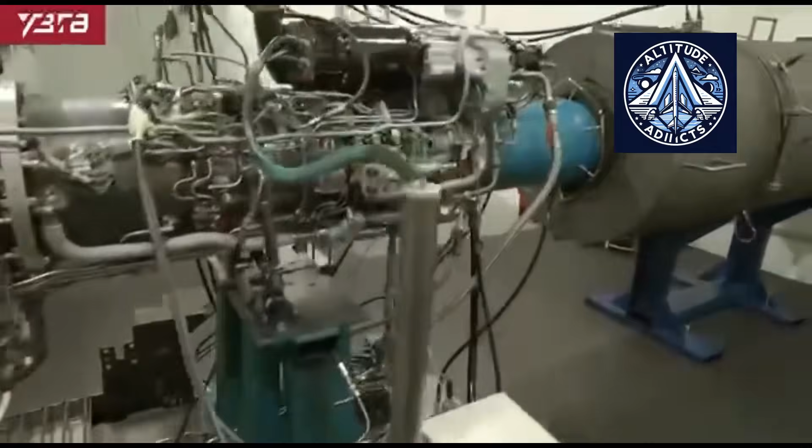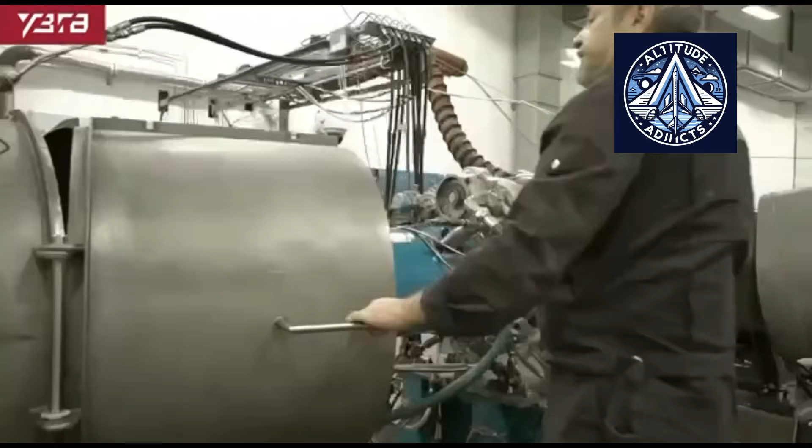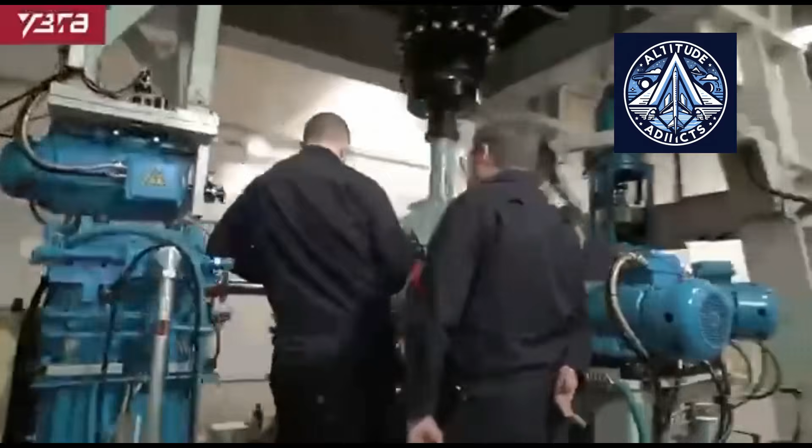Ural Civil Aviation Plant achieved a major technological milestone in Russia's aviation industry on April 22, 2026. The plant announced the successful completion of its transition to a fully domestic, computer-aided design system for onboard cable network development. At the center of this shift is CAD Max, a specialized Russian platform designed to automate complex engineering processes in aircraft systems.

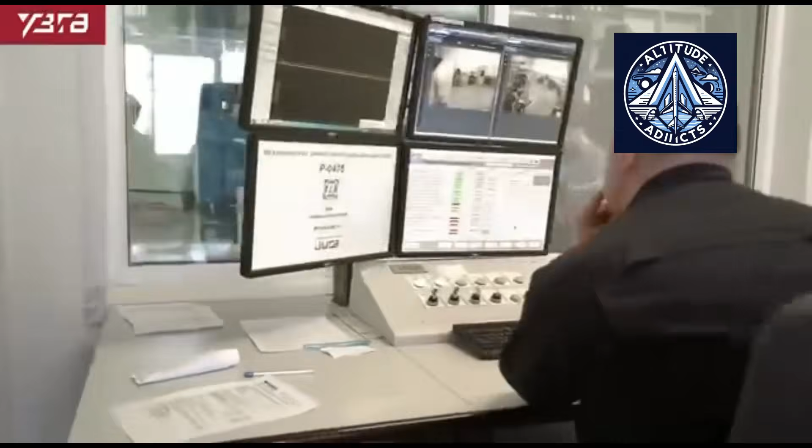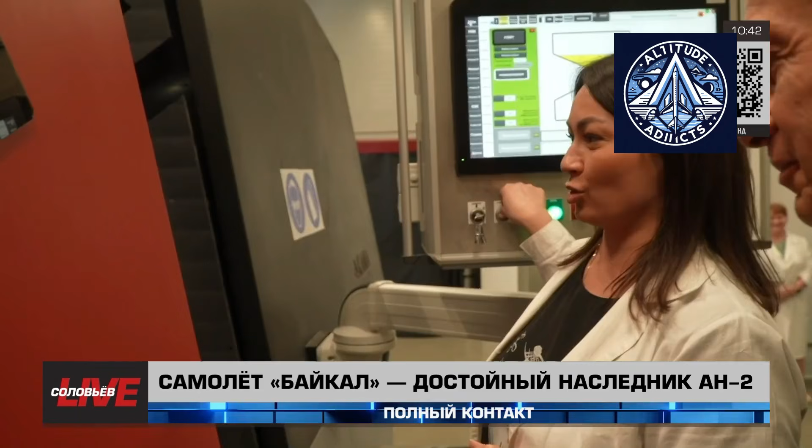This shift is far more than just replacing one software tool with another. It represents a deeper transformation in engineering methodology, industrial strategy, and digital independence. By moving away from foreign solutions like Mentor Graphics Capital and Zuken E3 series, the plant has taken a decisive step toward technological self-reliance without sacrificing performance or efficiency.

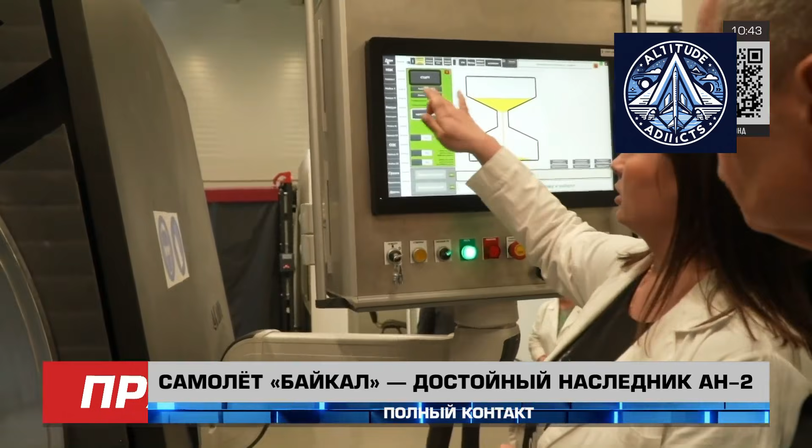And this naturally brings us to why cable network design is so critical in aviation. Modern aircraft are incredibly complex electrical ecosystems. Beneath the fuselage lies an intricate web of wires, connectors, and harnesses linking avionics, engines, sensors, and control systems. Designing these systems requires extreme precision, reliability, and strict adherence to safety standards.

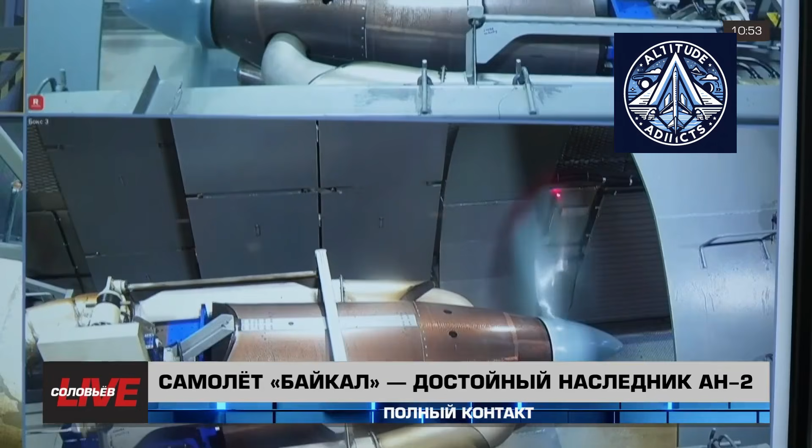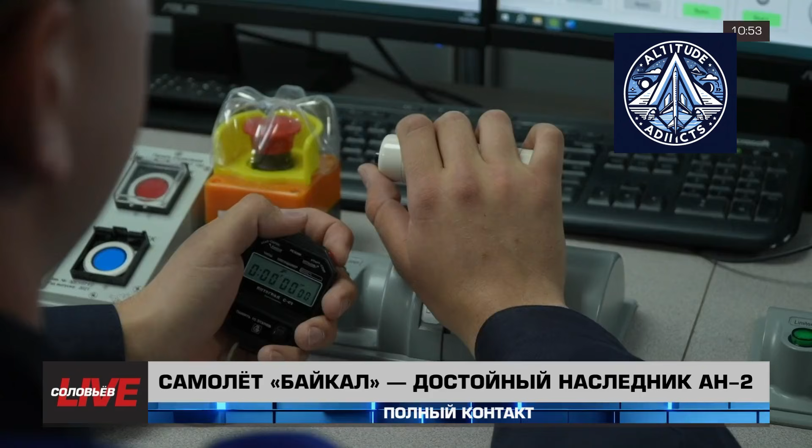Going further, cable design is not just about routing wires. Engineers must consider weight optimization, electromagnetic compatibility, durability under extreme conditions, and ease of maintenance. A single aircraft can contain hundreds of kilometers of wiring, making manual design nearly impossible. This is exactly where advanced CAD systems become essential. They allow engineers to model electrical systems digitally, simulate performance, and validate designs before production even begins.

For years, global leaders like Mentor Graphics and Zuken dominated this space, providing powerful tools for aerospace and automotive industries. However, reliance on foreign software comes with risks. When vendors exit a market, companies can suddenly lose access to support, updates, and even licenses. That is precisely what happened here, pushing engineers to urgently find a domestic alternative. Which leads directly into understanding what CAD Max actually is.

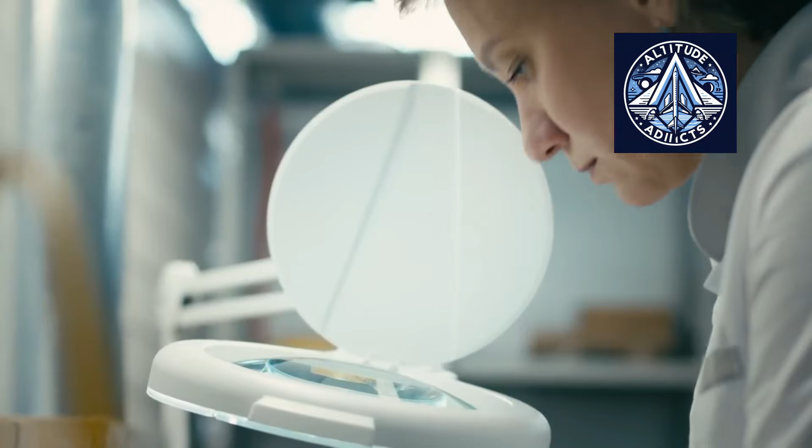CAD Max is a specialized Russian system developed for the automated design of onboard cable networks, along with hydraulic and pneumatic pipeline systems. It was created by the Aerospace Systems Design Bureau under Promtech Corporation. The system represents nearly 5 years of development and was introduced around 2020. It is now officially included in Russia's domestic software registry, confirming its readiness for industrial-scale deployment.

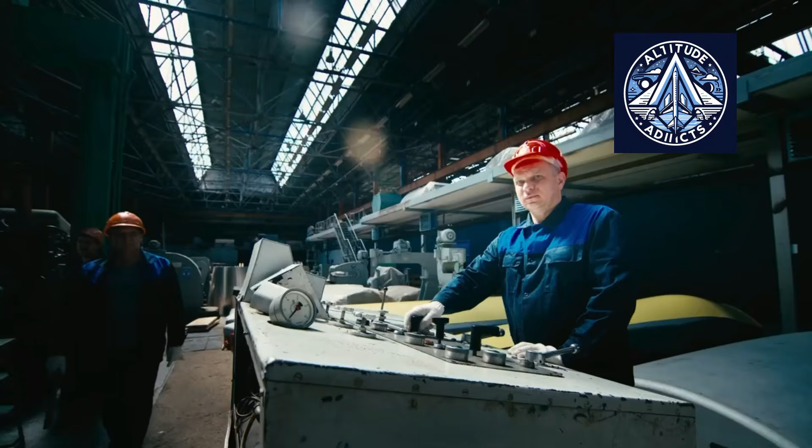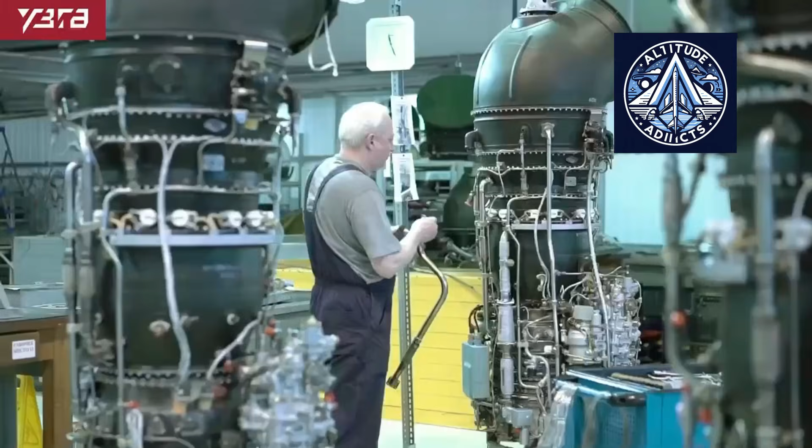At its core, CAD Max is a full engineering platform. It allows designers to build a complete digital model of an aircraft's electrical architecture, covering both logical schematics and physical layouts. This ensures accuracy and consistency across the entire system. The platform also uses a client-server architecture. This means multiple engineers can work simultaneously in a shared digital environment with real-time updates available to everyone involved, from design teams to production engineers.

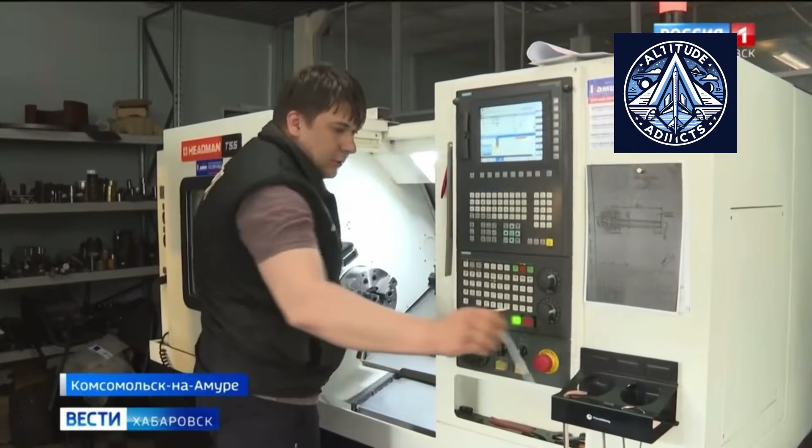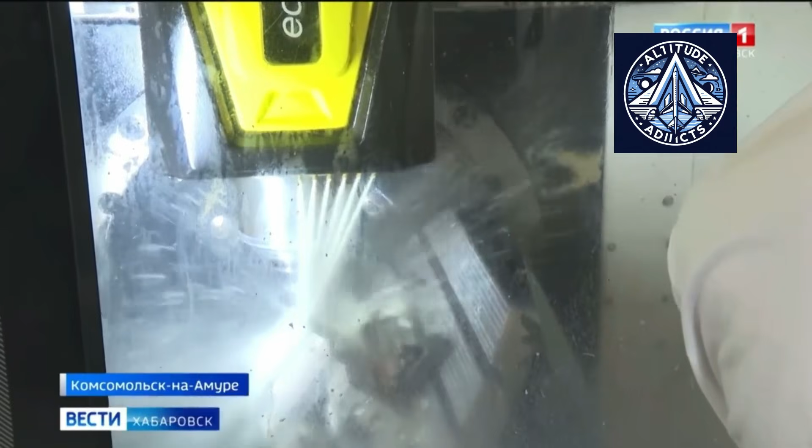Now, focusing on its capabilities, automation is where CAD Max truly stands out. The system performs complex engineering checks automatically, reducing manual workload and minimizing human error. For example, it verifies wire cross-sections, checks connector compatibility, selects appropriate materials, and even calculates bundle thickness and routing constraints. These processes happen in real time during design.

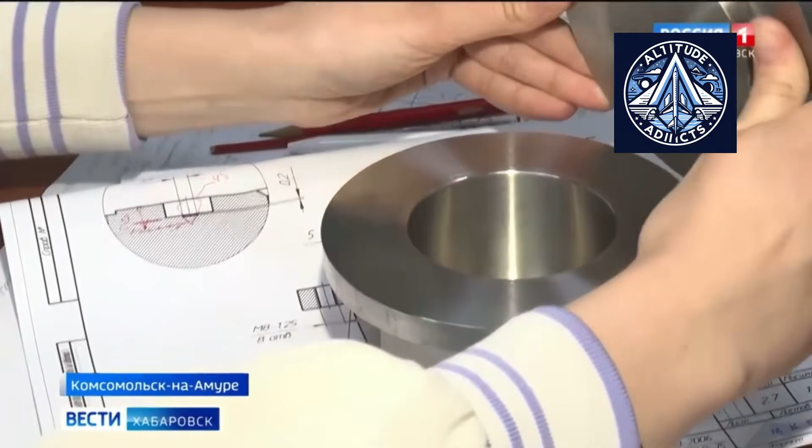At the same time, the software generates complete engineering documentation automatically. This includes drawings, specifications, wiring tables, and manufacturing instructions, all derived directly from the digital model. Another key advantage is real-time monitoring. Engineers can track system weight, material usage, and other parameters throughout the design process, enabling better optimization from the very beginning. And naturally, such a system must fit into a larger digital ecosystem.

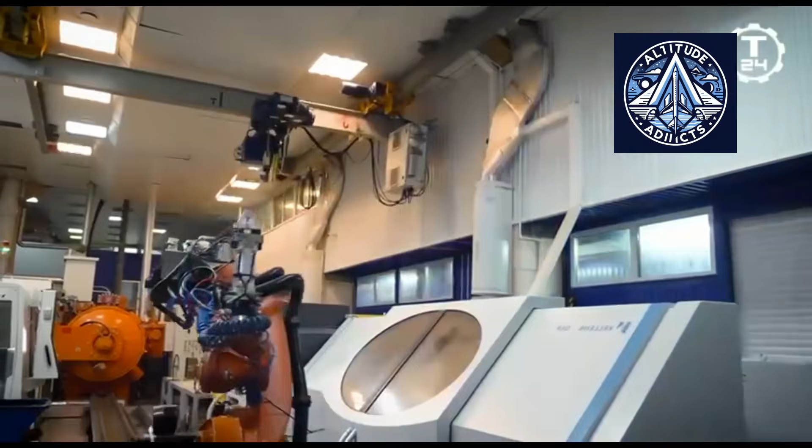The implementation at UZGA involved deep integration with existing IT infrastructure, including synchronization with a master data system based on 1C. Each component receives a unique identifier, and once created, its data becomes instantly accessible across all connected systems. This eliminates inconsistencies and ensures seamless coordination between departments. In effect, this creates a unified digital environment. Design, manufacturing, and logistics systems all operate from the same dataset, improving efficiency and transparency across the enterprise.

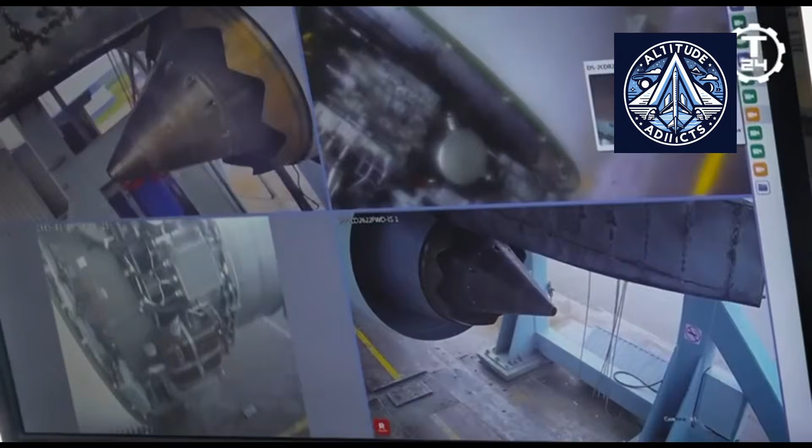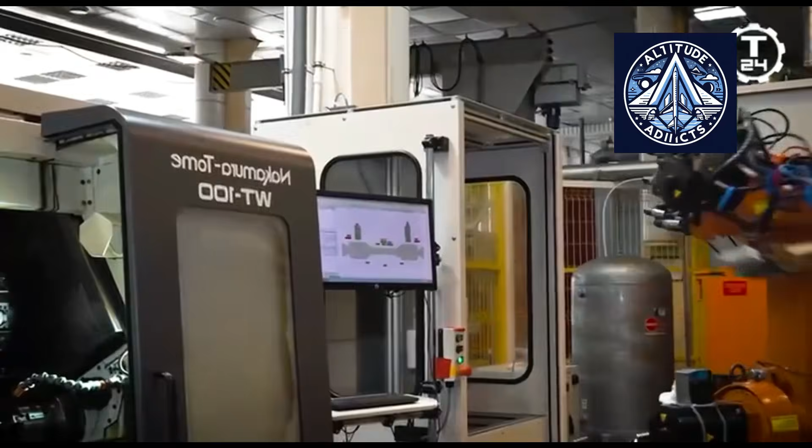When compared globally, systems like Mentor Graphics Capital and Zuken E3 Series have long been industry benchmarks. They offer advanced features such as three-dimensional visualization, simulation tools, and lifecycle integration. CAD Max has been developed to match many of these capabilities while focusing on localization. It aligns with national engineering standards and integrates seamlessly with domestic software ecosystems. This is particularly important in aviation, where data security and system reliability are critical. The platform also supports customization through APIs and plugins, allowing companies to adapt it to their specific workflows.

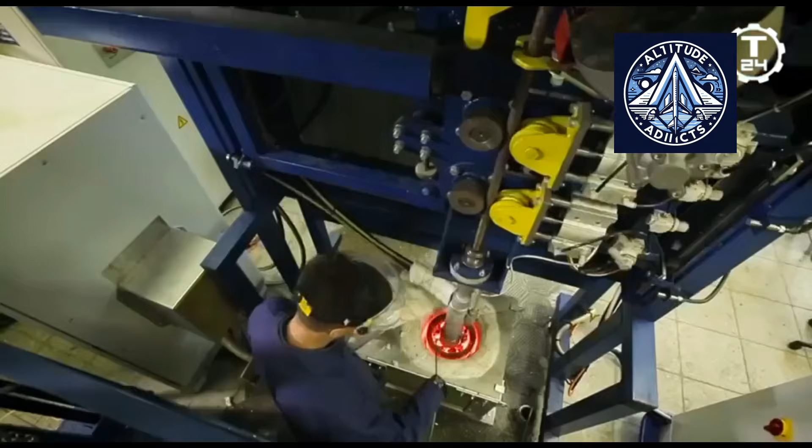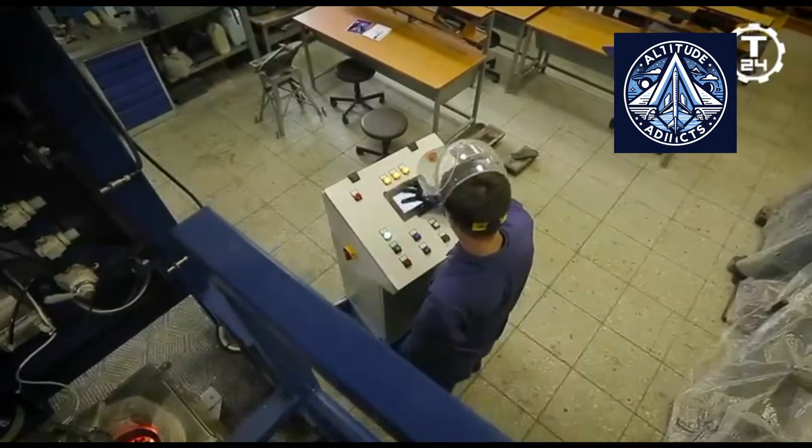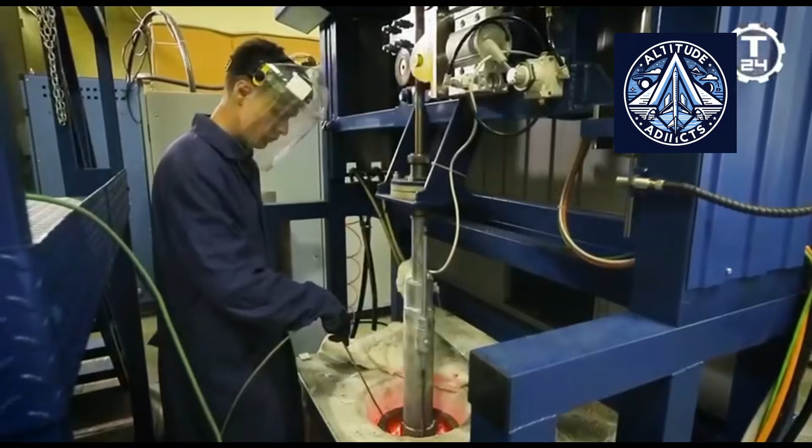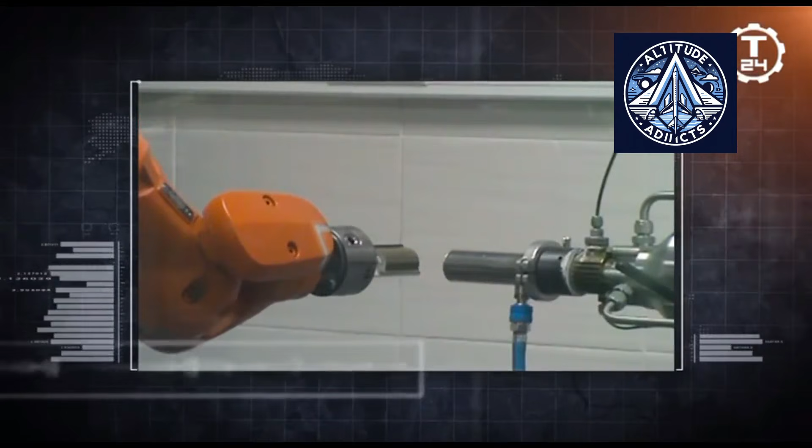Of course, transitioning to a new system is never easy. The process took over a year and required extensive planning, training, and gradual system integration. Engineers had to adapt to new tools and workflows. At the same time, production had to continue without interruption, requiring a careful, phased transition. One major success was preserving the existing component database. Built over years, it was successfully transferred and continues to grow by around 300 new components every month. Despite these challenges, the transition was completed without any loss in productivity or design quality. That alone highlights the robustness of the system.

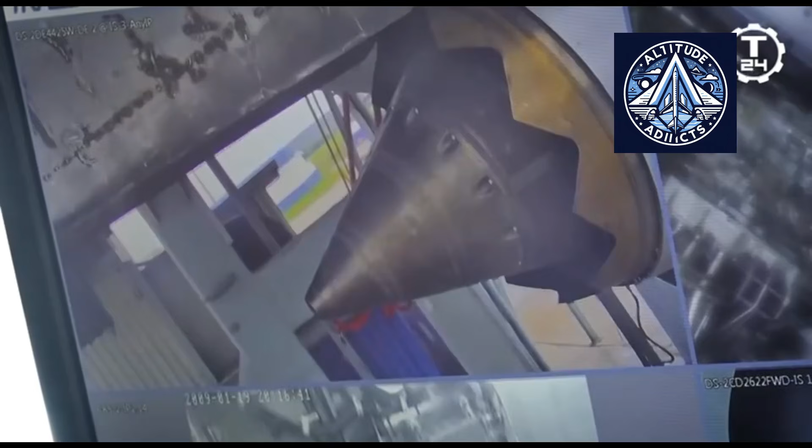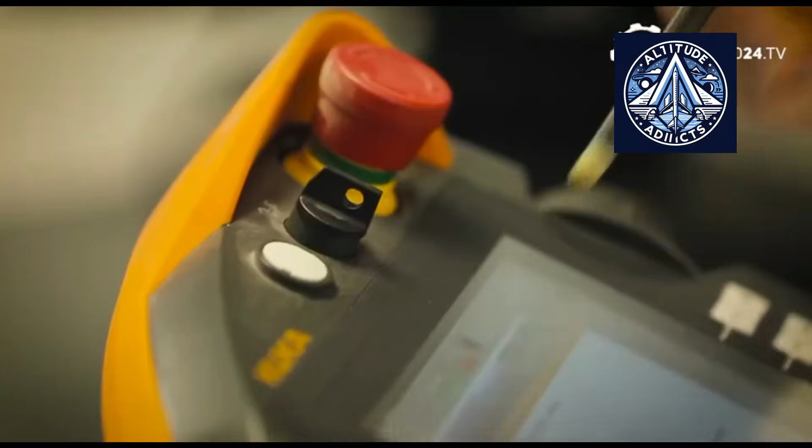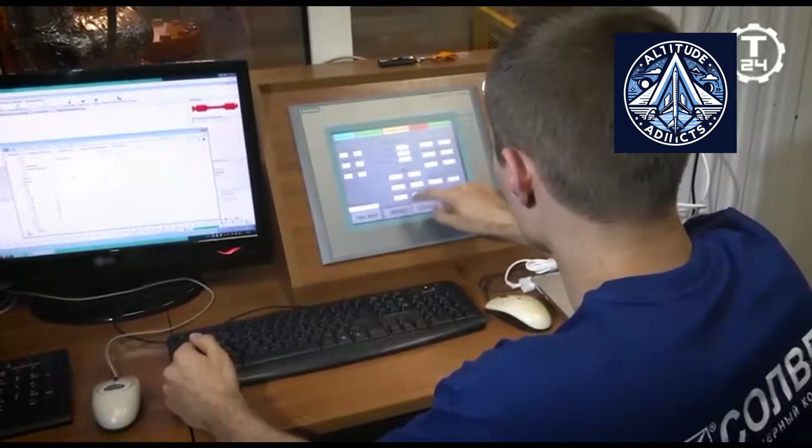And this is where Altitude Addicts takes a closer look at the impact. The shift has significantly accelerated documentation processes and improved coordination between engineering teams. Automation has reduced errors, while real-time collaboration has enhanced efficiency. Development cycles are shorter, and production timelines are more predictable. This is especially important as the plant continues producing aircraft like Baikal, UTS 800, TVRS 44, and the VK 800 engine family. These projects demand advanced tools capable of handling increasing complexity.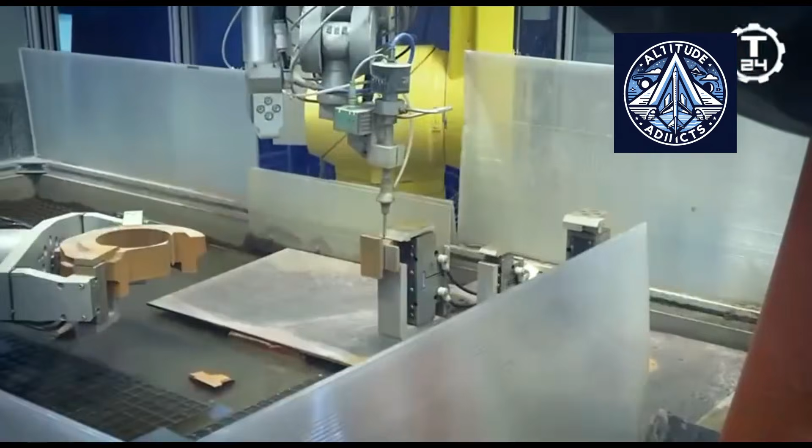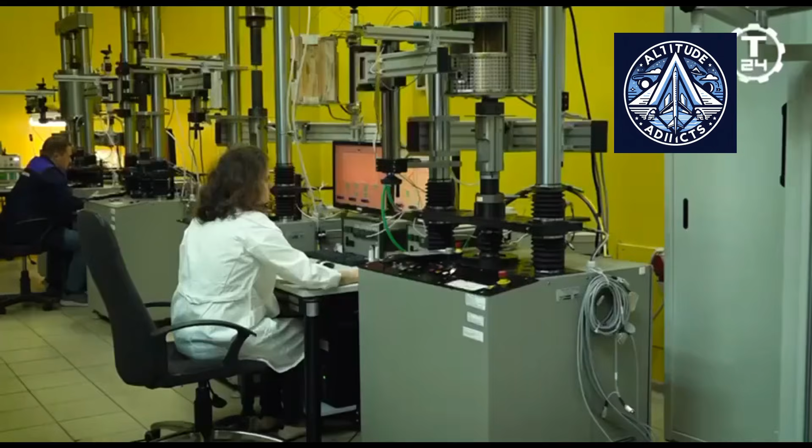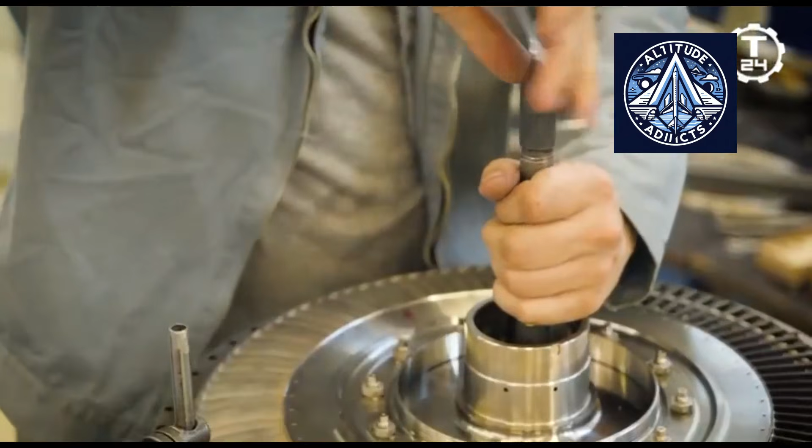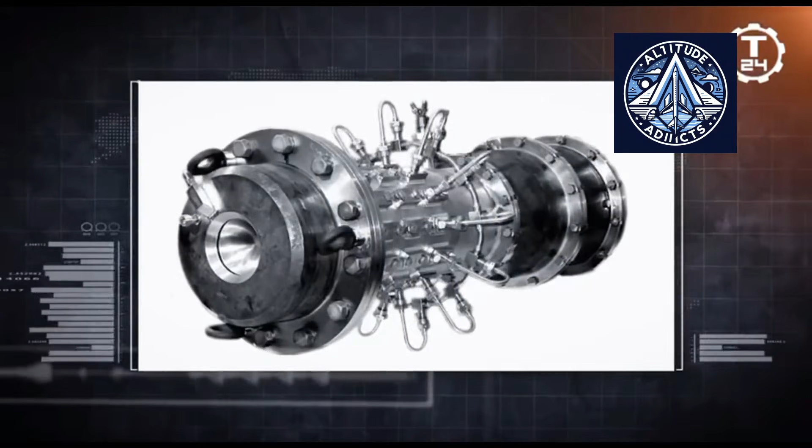Beyond aviation, this success signals broader industrial potential. Industries like automotive, rail, and defense could also adopt similar domestic solutions. From a bigger perspective, this transition reflects a growing push toward technological sovereignty. Control over critical software infrastructure is becoming just as important as physical manufacturing capabilities. Countries are now focusing on reducing dependence on external vendors while building strong domestic ecosystems. This approach not only improves resilience, but also drives innovation. As Altitude Addicts observes, aviation sits at the center of this transformation. Aircraft design depends heavily on advanced digital tools, making software independence a strategic necessity.

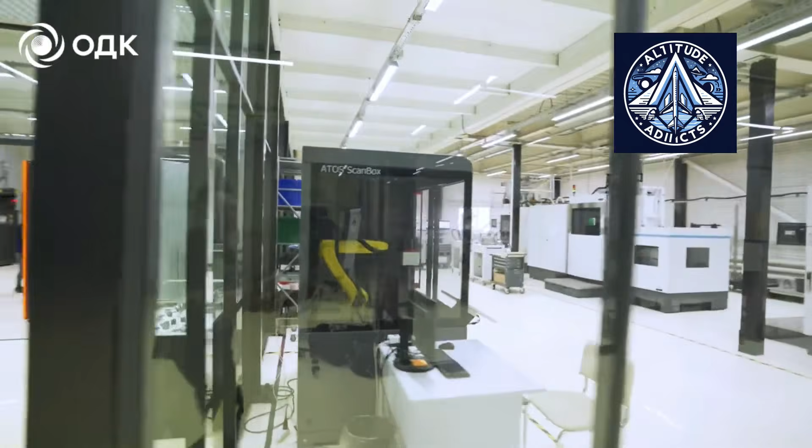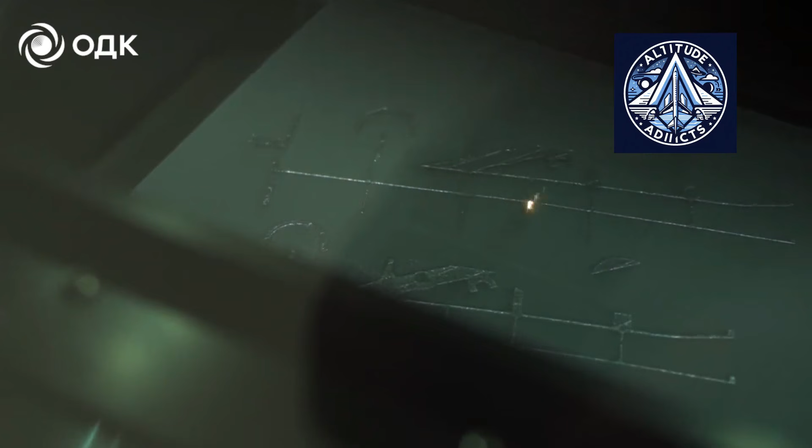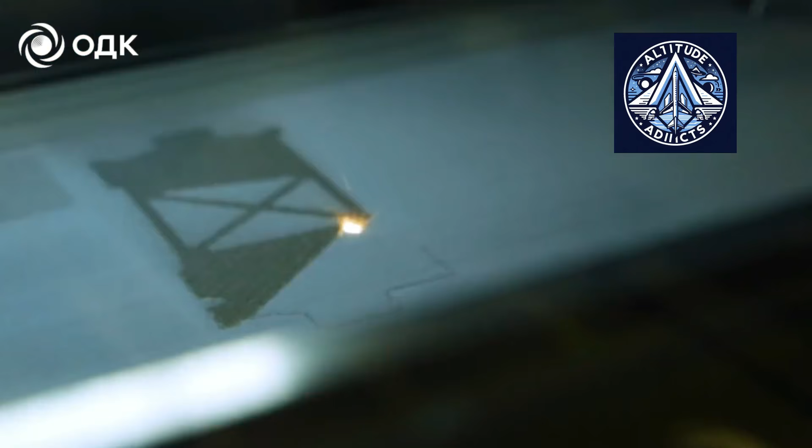Looking ahead, CAD systems are expected to evolve rapidly. Technologies like artificial intelligence, digital twins, and predictive analytics will further enhance automation and efficiency. The future lies in fully integrated digital environments. From design to maintenance, data will flow seamlessly across every stage of the aircraft lifecycle. CAD Max is a strong step in that direction. Its successful deployment proves that domestic solutions can meet the demands of modern aerospace engineering. In conclusion, this is not just a software upgrade. It is a strategic transformation. And as Altitude Addicts highlights, it sets a powerful precedent for industries balancing innovation with independence in an increasingly complex global landscape.